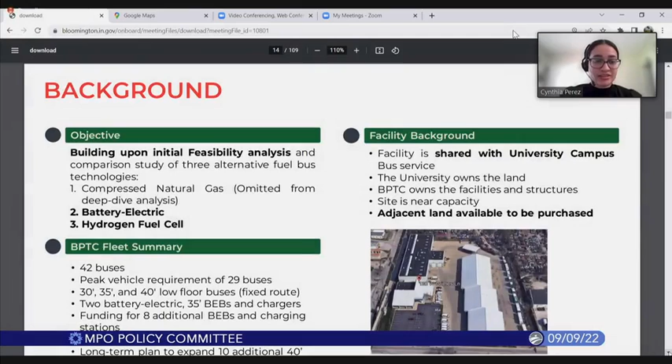Next slide, please. This is the information that we used for the analysis. Bloomington Transit has an existing fleet of 42 buses, with 2 buses being battery electric. Bloomington Transit has funding to procure 8 additional battery electric buses and charging stations, and they plan on expanding up to 8 60-foot buses, and also have long-term plans to expand up to 10 additional 40-foot battery electric buses. The facility is shared with the university campus bus service, and the university owns the land while Bloomington Transit owns the facilities and structures. The site is currently near capacity, however there is adjacent land available to be purchased.

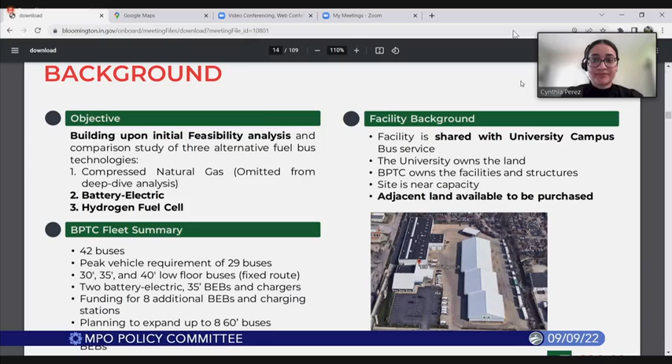Next slide, please. Now I'm going to be handing it off to Tamara for a more detailed analysis of the battery electric buses. Thank you, Cynthia. So for the battery electric bus technology, the first updated analysis that we did was the service completion analysis.

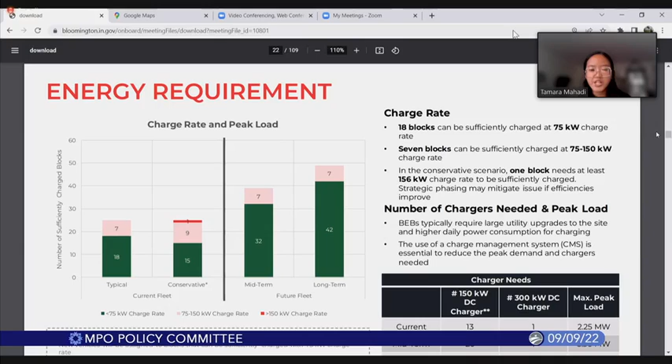Another analysis that we did was the energy requirement, and the aim of this analysis was to provide a very initial high-level analysis about what kind of charger will be needed to fully charge the vehicle so that it can fully complete the service on the next day.

The graph shows the need for the current fleet, before the expansion and the new BEBs added, and it also shows the need for the future fleet after the expansion. Based on our analysis, most of the service will only need between 75 to 150 kilowatt charger, and one 150 kilowatt charger can be used to charge two buses. There might be a need for a faster charger for the conservative scenario during the most challenging day.

One faster charger, about a 300 kilowatt charger, can be added if needed. Based on our calculation, without any optimization of when to charge, the maximum peak load needs will be about 2.3 megawatts in the near term, or about 3.9 megawatts in the future. However, there are ways to minimize this peak load, such as utilizing a charge management system.

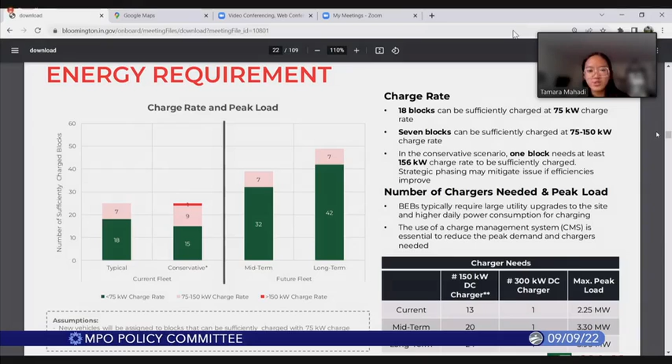That software will create the most optimum charging schedule to reduce the utility cost and the peak load needed to charge the whole fleet. Based on those analyses, we came up with 3 options for the full transition towards a full BEB fleet. The first option is aiming for 2035 full BEB fleet, which means about 88% of the service can be completed just by waiting for the technology to improve.

The remaining failing service can be completed by using better, more efficient vehicles, or by doing service changes. The second option is to aim for full transition in 2040, meaning about 95% of the blocks can be completed just by waiting for the technology to improve, with the remaining blocks completed by doing service changes. Lastly, aiming for 2050 full transition, where all blocks can be completed by just waiting for the technology to develop, without any additional strategies needed.

And now I will pass it over to Kate for the fuel cell technology.

Thanks, Tamara. So I'm going to run over a few of the trade-offs compared to BEB that we get with fuel cell electric buses. First off, fuel cell electric buses have a range of 250 miles, which can cover most of your existing service profile on a single fuel. There are a few routes under typical conditions that cannot be covered by fuel cell electric buses, but even under conservative conditions, your wintriest day, 85% of your existing service can be covered by today's fuel cell electric bus technology.

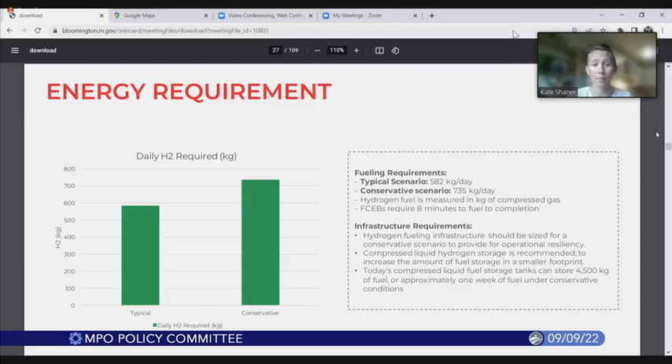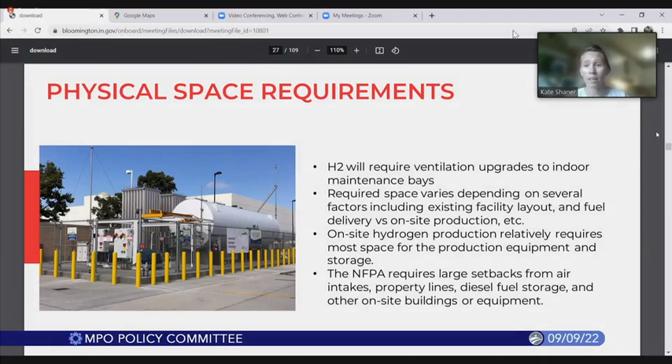That's the footprint of the equipment itself. The National Fire Protection Association requires some pretty large setbacks from property lines, buildings, air intakes, and other vehicles to ensure that this lighter-than-air gas can't escape and become ignited. We'll show those a bit further later in this presentation. The other consideration with hydrogen fuel cell vehicles is your maintenance area. If you're maintaining vehicles indoors, those areas need upgraded ventilation systems to evacuate any hydrogen that may leak from your vehicle tanks.

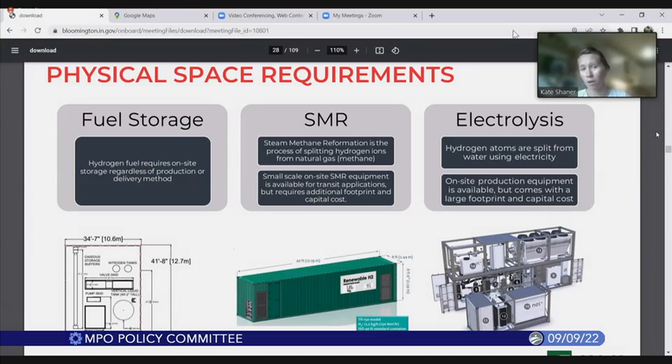The next type is electrolysis. You bring in water and a lot of electricity, and you split your water into hydrogen and oxygen. You put the hydrogen in your bus, you release the oxygen. It's a great option if you have a lot of space, cheap electricity and water in your area. It becomes less great if you don't have that physical footprint or cheap water and power. It's also the most expensive option for bringing fuel to your site under today's technology conditions.

So good news for FCEV, you can complete most of your service today, no problem with this technology. By 2035, we expect the technology improved enough that you can complete all of your service, but there are some definite hiccups in the path of getting fuel to your site and storing fuel on your site in terms of space and upfront cost.

Thanks, Kate. In the following slides, I'll be providing an overview of the life cycle cost comparisons for battery electric and fuel cell electric buses.

For the maintenance cost, the cost of delivered hydrogen has the lowest compared to the on-site production of hydrogen and battery electric buses. I would also like to note here that the annual and lifetime maintenance costs were calculated only for the weekday service vehicles, since they would be using the most amount of mileage and fuel.

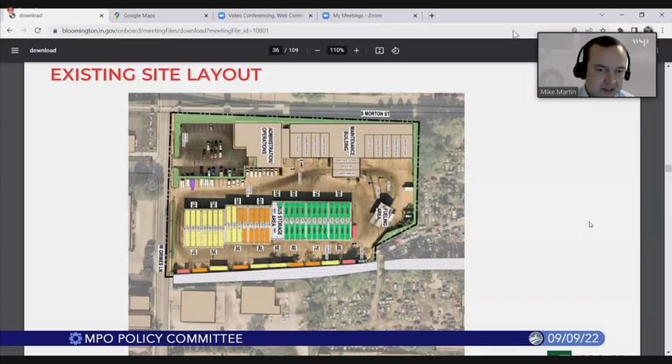Let's step forward and we'll see a clean layout of this same site. This is basically just taking off the aerial so you can get a cleaner look at it. One item to note, you see the blue hatched area just below the site.

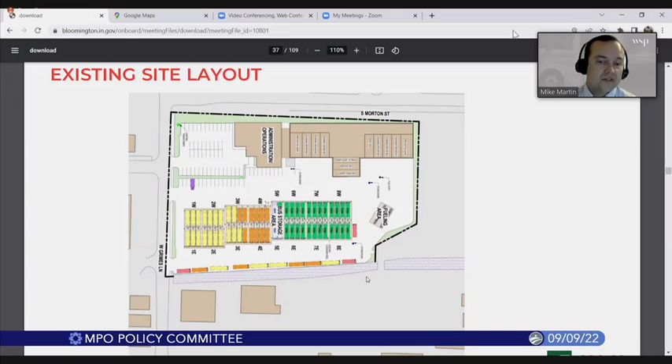That's where we have an existing creek that runs adjacent here. There have been flooding incidents. So one of the pieces of what we were trying to look at during this feasibility study was how do we make this a resilient operation? How do we get this equipment out of harm's way? And if we're looking at potentially mitigating that, where does zero emissions fall in there? Let's go ahead and step forward.

One item we were tasked with looking at here is, okay, we know what the realities are of your existing site. What does it open up? What can be done if there is feasible expansion? So while we don't have any costing or real estate analysis to this, that wasn't part of our scope.

We did look at the reality of this adjacent car junkyard that's possibly something that you could expand into and acquire as an option. This shows basically the outline of that area. If you were to take this, you would more or less smooth it out, get it to the right topography, which actually works pretty well. There's not a major grade change here, and you'd provide some access.

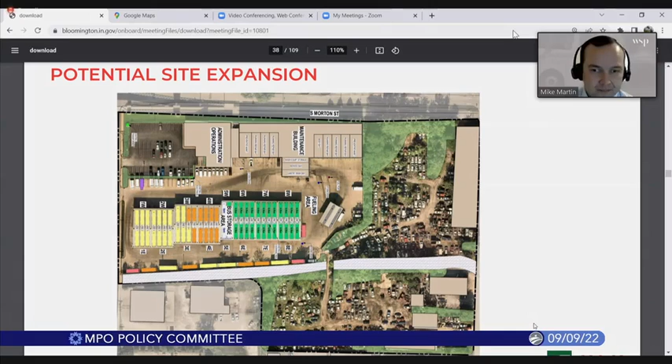So there is one pinch point you'll see. There's an existing bridge that goes over that creek on site. When we look at that, that's probably something that would be difficult to move forward with. You would probably want to build something larger or more robust to have consistent bus traffic over there. So we noted that as a challenging spot in any concepts that utilize that space, not directly adjacent, but across the creek. Now let's go ahead and keep moving.

The next one will just be a clean variant of that. I think for sake of time, we'll keep jumping.

One more item we looked at is if we decided that we needed to utilize some on-route or opportunity charging. So basically, if there are some routes that can't quite make it with the range of the technology when purchased, one way to mitigate that is to have opportunity charging: take a bus while it's on route, at a transfer center or a stop, and capture those 5, 10, 15 minutes, whatever your layover time is, at a higher power charging.

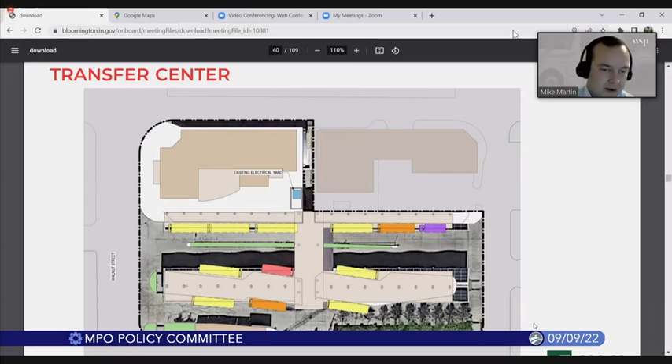So let's go ahead and jump forward. Again, clean, but we can jump forward.

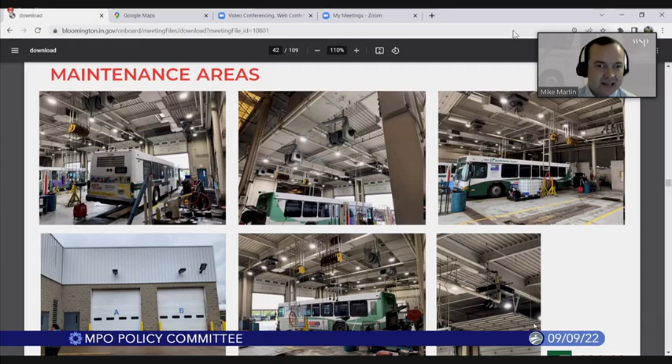All right, as we walked through your sites, we basically took a look at what is existing, what would need to be mitigated to either achieve battery electric bus operations and maintenance, or hydrogen fuel cell electric bus maintenance.

For battery electric bus, you've got good clearances. Traditionally, buses have been moving more and more components to the top of the bus. That's only being exacerbated by the technologies we're utilizing now. Fuel cell electric buses and battery electric buses, more and more equipment is going up top, so overhead clearance is always very, very important. Excellent overhead clearance in your facility.

What we would want to look into would be either having some mobile scaffolding or perhaps introducing an overhead monorail beam, so that staff who worked on top of these buses or had to access anything on top could tie off for safe operation and to perform their tasks. But both of them have great clearances for that.

You'll note that there are some, see if you can see them in the picture on your top right, you have some heating fans. Those, amongst some other lighting issues and just the existing layout here, would require some remediation to operate hydrogen and fuel cell buses.

When you're operating with hydrogen, it is a lighter than air fuel, so it can become trapped up in your beams. It would require some mitigation, which we'll go through shortly, on your exhaust ducting, heating, possibly lighting for explosion proof. I think you're possibly outside the exclusion zone there, but there'll be some minor modifications to the facility.

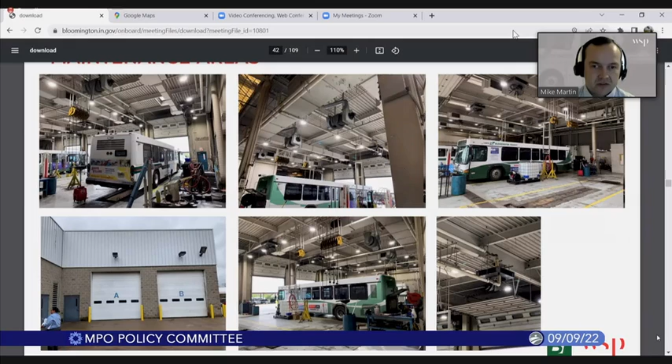Overall, though, you're in actually pretty solid shape within these facilities, but there are some challenges that would require updates. So go ahead and step forward.

Wash bays, very similar scenario, good overhead clearance, but we wouldn't be expecting as much requirement there. Where we're going to run into issues is still going to be lighting type, areas where we're going to have to mitigate with exhaust so we don't have hydrogen pooling up at the ceiling level. And then we have some open flame type exposure.

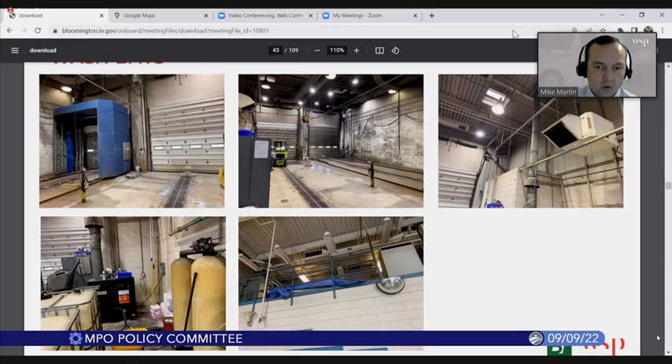One misnomer I want to always run through: we quite often get the question of, well, can we get rid of that fuel island as soon as we go to a battery electric bus scenario? The answer on that is no, because that's still going to be a nightly service cycle area. You have to get someone out there to sweep out the bus, do quick top offs on fluids, any type of quick service as it enters the site. That is still going to occur every night. Battery electric bus, hydrogen fuel cell, no change. So those tend to be kind of a static operation.

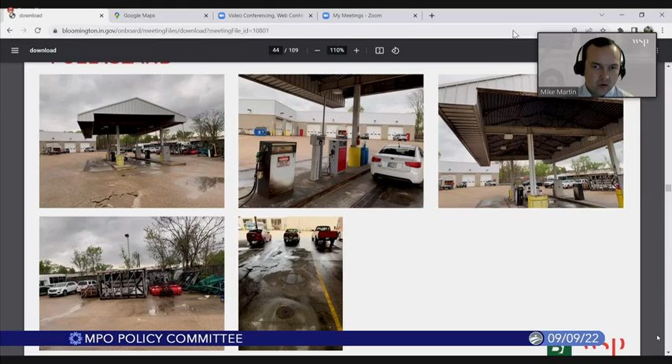But we believe that this would actually work with hydrogen fuel cell. The only mitigation might be cutting a slight peak vent just to allow gas to escape if required, which would be the same as we step forward.

On the parking canopy, again, we have enough open air and air exchange here that hydrogen fuel cell could work. This overhead structure does not have capacity to support pantographs or any other type of overhead electrical distribution at a scale that would be required to serve this entire fleet.

So our recommendation would be that if you move into a battery electric scenario, you remove this entire canopy, or at least the portion that's going to be serving your fleet, and change that to the modular system that we're noting out here and basing around.

On the bottom right there, you're seeing again those kind of wall parked buses that are in a crush park scenario because you do not have dedicated parking spaces available to them. And then top right, those are your column spacing mounted existing charging units. So we will step forward.

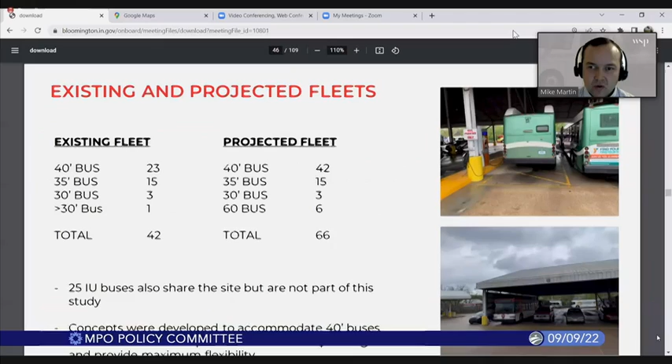All right, so what we looked at here is the existing fleet, and we basically tested this out in two ways. The existing fleet at 42 buses, and we came to a solution of 66 buses based on some realistic expansion that could be served on this fleet. This site, you could probably move that forward, certainly a few more Artics, different fleet mix, but this is what we actually concepted against. And we tried to do this so that 40-foot buses would always be able to be accommodated.

So if your fleet mix does change, we noted that one of the ways to mitigate some service issues and shortcomings on battery electric is to go with a 40-foot bus, because those tend to have a little bit better capacity and range.

All positions can accommodate a 40-foot bus, so if your service changed and made that move, we've accommodated that in this feasibility study.

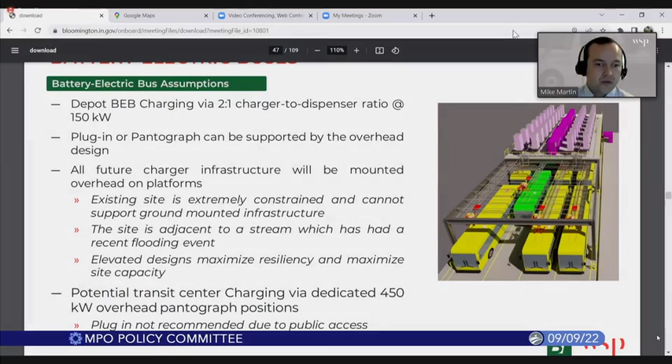For the transit center, we noted that a 450 kilowatt charger would be required or recommended to make the charging useful during that dwell time. That would typically be an overhead pantograph. We don't recommend plugging on that because the public can get too much access to it, it also requires a driver to plug it in, and finally it's extremely expensive and difficult to wield a cord at that type of kilowatt charging. Induction is not recommended right now because there are 2 competing manufacturers and there's not a standard. So during this feasibility we wanted something future-proof. Induction charging, when that comes to a standard, would come back into play, but until then, before that standard, we would stick with pantograph and keep moving forward.

Okay, so this is the first pass at how you could accommodate a charging scenario without expanding your site. Under this, the Bloomington transit fleet basically fits in the same footprint, with a very similar parking configuration utilizing similar jogs with that overhead frame structure. What you see in the pink area is a decked area holding your charging cabinets and all of your transformer and switchgear lineup. Basically your utility feed would trench over to a column, then feed up that column into that switchgear, and out to your charging cabinets. From those charging cabinets, they would go on the underside of that overhead frame, typically built every 5 feet on center with joists, feeding either a pantograph or a plug-in position to the bus below.

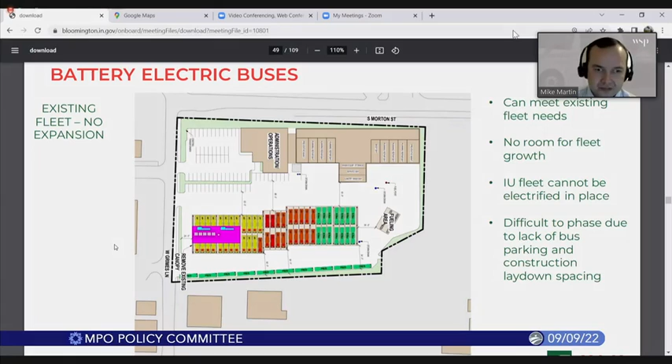This will be extremely difficult to construct because you have nowhere to utilize for construction staging. When you have to actually build columns and do demo on your overhead canopy, your existing buses really have nowhere to park. So let's step forward. This is utilizing the projected fleet on the expanded site. At this point, you're taking all 66 of those vehicles and basically expanding them out into the space that was partially utilized by the conventional IU fleet.

And then we're going into that new junkyard site, constructing a secondary overhead platform yard. When you look at these in more detail on a larger screen, typically every 4 rows you have your column spacing. That's a pretty standard setup for the span you can get before you start having extreme steel costs, so it's kind of standard framing that allows for that.

This scenario also gives you the availability to have your IU fleet electrified. Note, all of these concepts are sized in basic setups so that you could mount overhead photovoltaic above these frames. So you could basically have a decked parking scenario similar to a covered canopy, but utilize photovoltaic to actually gain back some costs.

Solar only provides a drop in the bucket of the power you actually use to charge these vehicles, but it does help you capture costs during the day when rates are higher, and then, depending on your setup, you can typically be pulling out energy when the buses are home at night.

This is a huge benefit because you can build that secondary, or the first set of charging, and energize the whole yard while utilizing the flat portion of your yard that you paved on your expansion as your bus parking during the transition period. So this is much easier to implement, which is a huge benefit to expanding your site. Keep running forward.

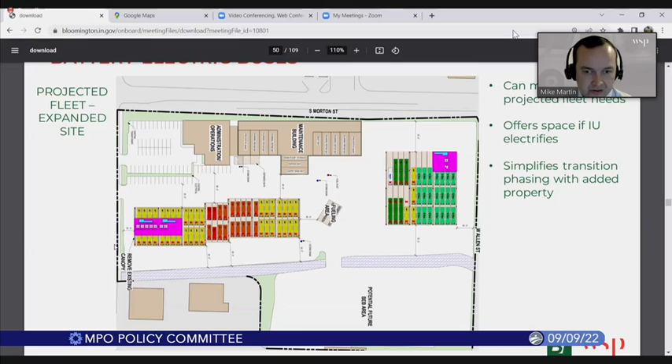This is just an option we made to show that if you had aspirations to go much, much larger, could you even do more of that? This just shows you can get a much larger amount of space here. If you utilize that bottom portion of the expansion as well, it gives you more space for future expansion.

There are some challenges though. Your maintenance facility is probably not sized for this and will require major upgrades or additions. And then you're going to have that stream crossing, where you're going to need some engineering to make sure that can handle bus design.

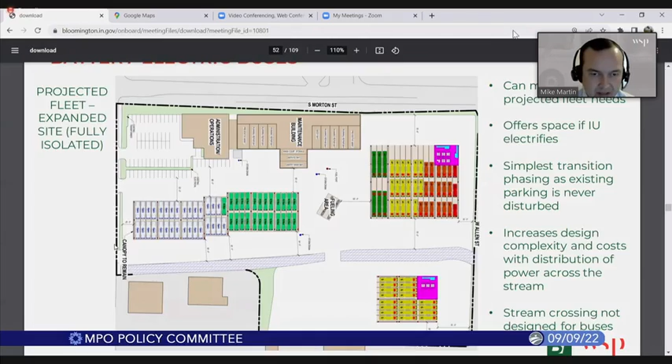So let's just keep running forward. Anyone feel free to stop me for questions, but I know we're going quick, so I'm trying to keep going. Again, similar to this is just showing that space. Let's step forward one more time. I want to get to the hydrogen concept. We've got about 5 minutes left.

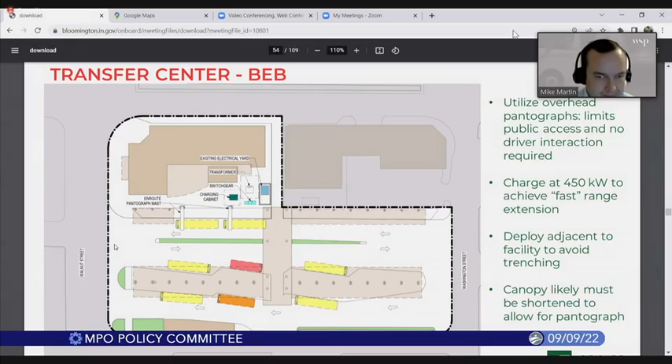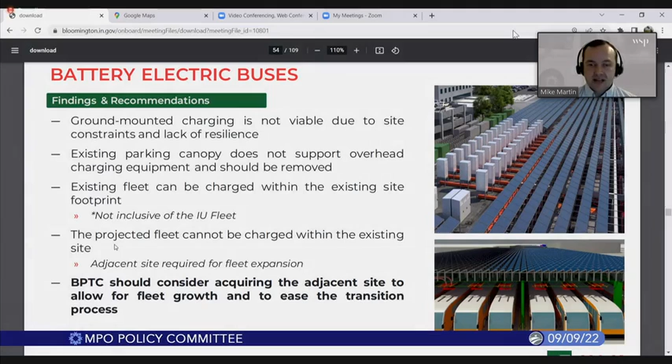For battery electric buses, ground mounted will not work for your facility. Your existing parking canopy can't support it, and your existing fleet can be charged within the existing site, but anything projected requires that you expand this site. We recommend that you do look at acquiring that site because that would greatly ease the transition process.

Let's step forward to hydrogen. I'll skip going over the deliveries and SMR, Kate did a good job of running through that already. But one of the other items to note is we were looking at this to try and reuse your existing fuel island. It provides the simplest deployment.

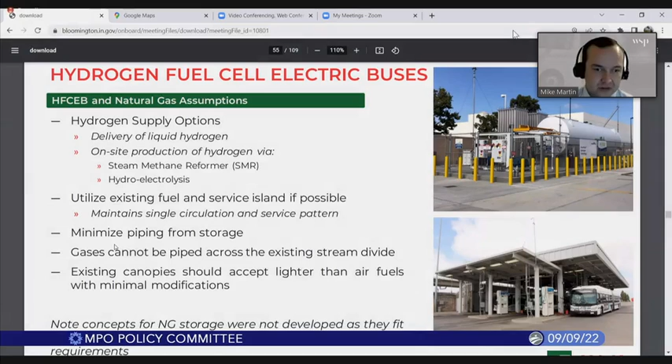It also allows for the single circulation pattern instead of having separate isolated circulation patterns for two fueling types. We tried to minimize the piping from storage. Due to the size of the hydrogen molecule, it is extremely difficult not to have leaks, and that has extreme costs for the specific piping type utilized to do that. We don't expect it's viable to pipe that across the existing stream. That becomes too much of a cost and too much of a mitigation factor, so we did not study that. If it's on the other side, it's fueled on the other side.

And the existing canopies should be able to handle lighter than air fuels with minor modifications. Also note as we step forward, natural gas was considered for site footprints, but we did not actually develop those. Natural gas can fit within a smaller footprint than a hydrogen study. So if you decide not to go zero emissions and go that way, everything that's feasible with hydrogen is even more so feasible with natural gas for concepting.

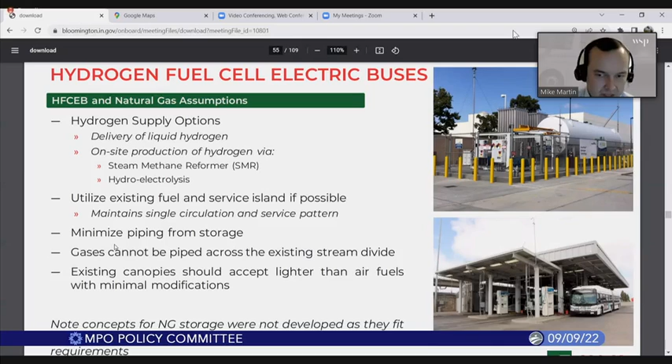So again, when we go to the maintenance facilities, you can't have any open flame heating system. You have to have non-combustible walls and ceilings, standby power for all monitoring systems. Anytime you're doing major overhaul, you have to have a way to defuel and store that hydrogen. You would need all new detection systems and alarming systems, new mechanical exhaust, and new designated spaces and automatic fire suppression that's required due to the lighter than air fuel.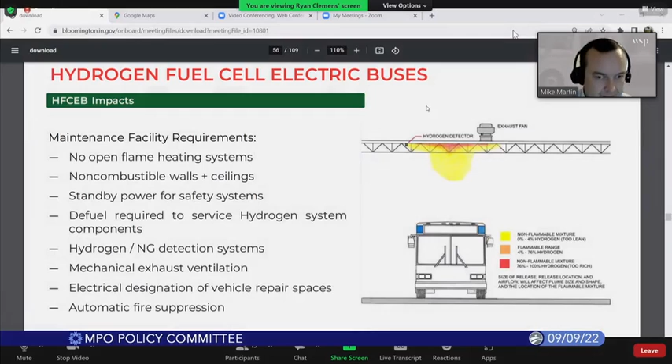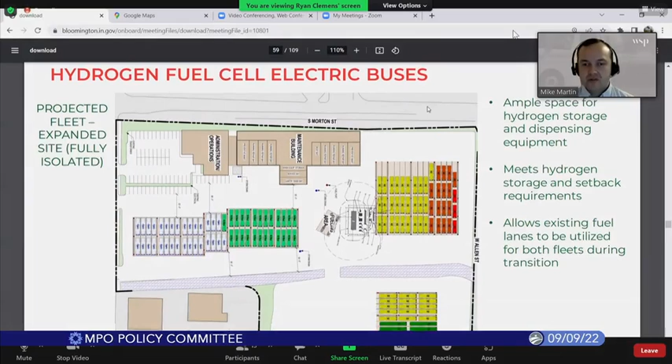All right, let's look at the next slide and then go to key findings. So again, this just shows that you can accommodate it as soon as you move to the expanded site. So it is viable as soon as you move to expanded site. You can only do on-site generation while utilizing the full site, which is not recommended based on the circulation. So go ahead and step to takeaways of hydrogen. Sure, we'll just jump to here. This will work. I think Cynthia, you were going to present these?

Yes, just to quickly go over the key findings, through this analysis it was found that BEVs are less costly and have lower life cycle emissions when compared to fuel cell electric buses. However, battery electric buses would take the longest to transition. With current battery electric technology, approximately 60% of the current blocks can be completed in the typical scenario.

And for fuel cell electric buses, it was found that they are viable under the multiple fueling scenarios. However, large on-site electrolysis is extremely nascent, and SMR produces greenhouse gas emissions on-site. With the current fuel cell electric technology, approximately 95% of the blocks can be completed in the typical scenario. And the fueling infrastructure to support these vehicles requires a large on-site footprint and high upfront capital costs.

And for the cost analysis, when analyzing the costs for both alternative fuels, it was found that battery electric buses have a lower life cycle cost estimate when compared to the fuel cell electric buses. Next slide, please. Okay, and in this following slide, we'll be reviewing some of our recommendations and next steps.